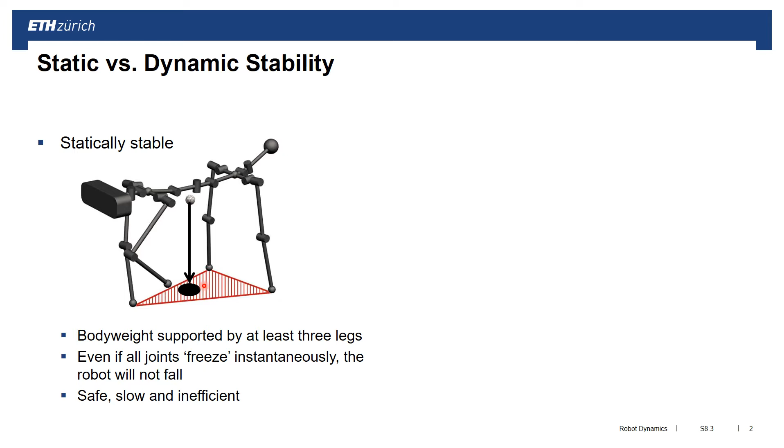When talking about control, we have to distinguish between static and dynamic locomotion. Static locomotion means that we are statically stable, so the body weight is continuously supported by multiple ground contacts, by three ground contacts that make an extended support polygon, and the center of gravity stays within the support polygon. That means even if we freeze all the joints and immediately stop the system, the center of gravity remains within the support polygon and the system does not fall over. This is how systems used to be controlled when we only had position controlled systems that moved relatively slow, statically stable. I wouldn't say this is the type of research people are doing right now.

The second type of gait we have to look at is dynamic walking. Dynamic walking means we have only few points in ground contact - there might be just single point contact, no ground contact, or lines of ground contact. That means that if we stop the robot, it will just fall over, so it has to actively balance, otherwise it cannot stand. These gaits are typically fast and energetically efficient, but they're much more demanding for control and actuation.

In the first part of this video segment, I will discuss the statically stable part.

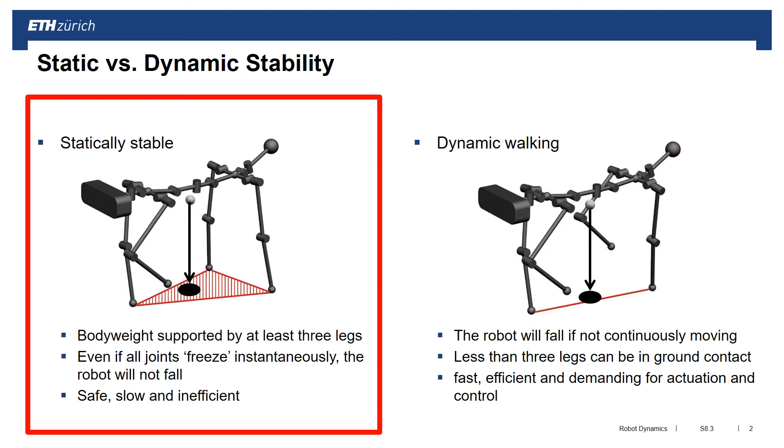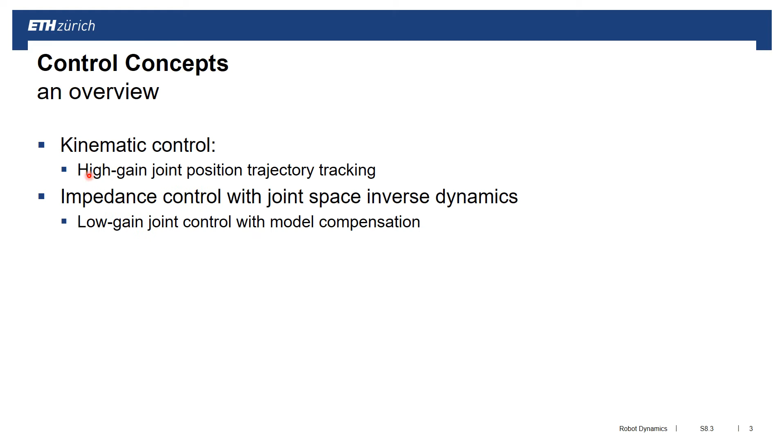In this lecture, we looked at 4 different control concepts. The first thing we looked at was kinematic control, meaning we were planning a position motion with high gain joint position trajectory following. The second thing we looked at was impedance control with joint space inverse dynamics - in other words, we included PD feedback gains in every joint, like a spring damper element for every joint, plus some model-based compensation, so low gain joint feedback plus model compensation.

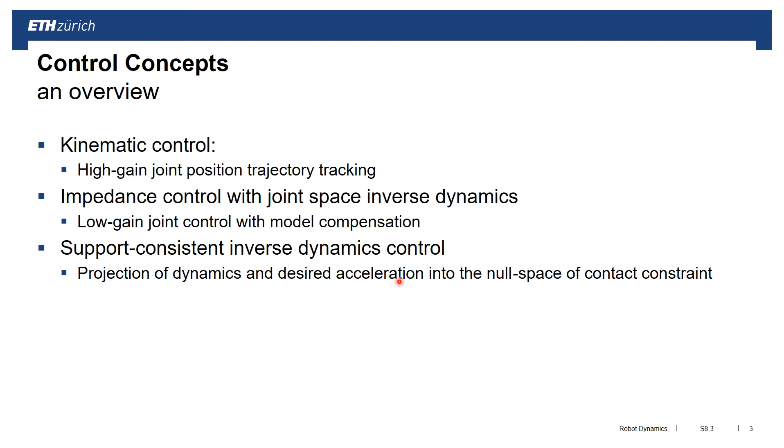The third control method we looked at was support consistent inverse dynamics control, which means we defined how the system is moving, then projected the dynamics and desired acceleration into the null space of the contact constraints, and did inverse dynamics with the support consistent formulation. The fourth and most powerful formulation we derived was task space inverse dynamics control, where we directly regulate in task space by defining a sequence of quadratic problems, a sequence of objectives with different priorities.

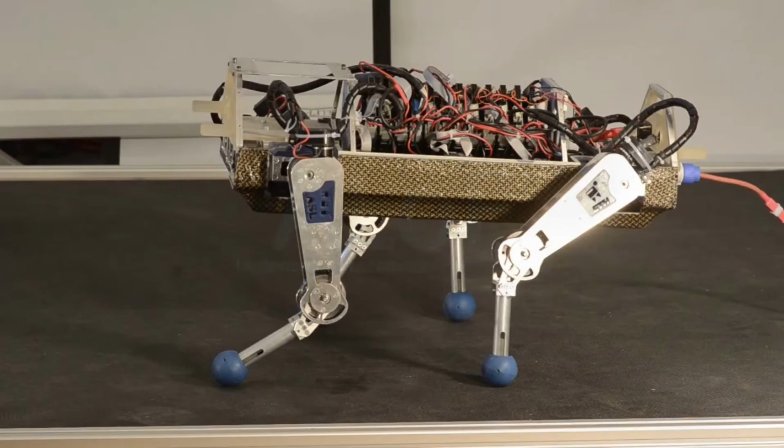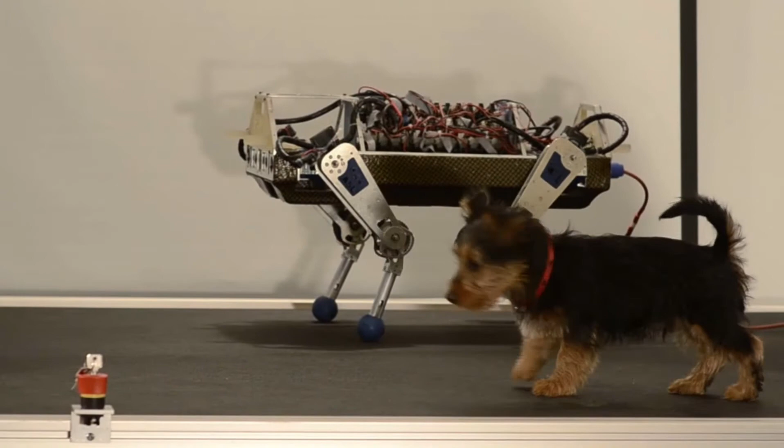We would like to start by looking at one of our very first prototypes developed at ETH. This is Alof, walking purely statically, so the center of gravity remains always within the support polygon. That means we're shifting the center of gravity, then moving one leg, moving another leg, shifting the center of gravity again. What's happening is that the main body controller determines the joint angles that need to be sent to the controller and then executes this. So this is pure feed-forward position planning and execution.

We are looking at this in the form of a small quiz where we calculate the motion of a complex gait with such a system and then apply either inverse dynamics or inverse kinematic control.

If you look at the floating base system of this Alof robot, we have 4 legs. Every leg has 3 degrees of freedom: a knee flexion extension, a hip flexion extension, and a hip adduction and abduction degree of freedom. So 3 degrees of freedom times 4 legs equals 12 actuators in total. Plus we have the base, which is free floating, connected to the inertial frame through an unactuated base - 6 degrees of freedom, 3 in position and 3 in orientation.

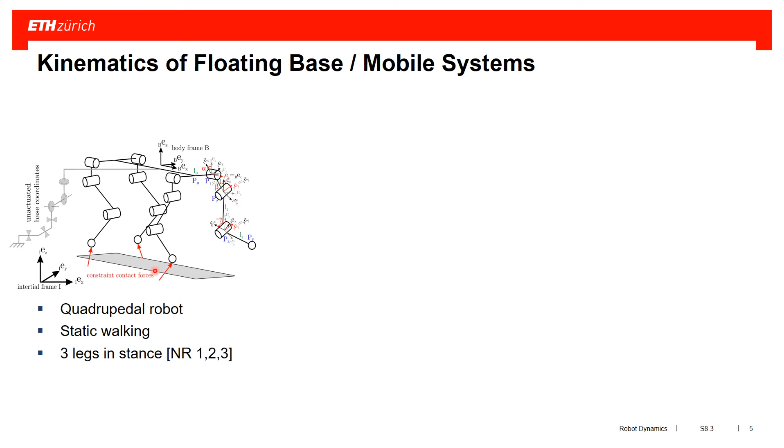If you do static walking, we're moving one leg at a time. We have 3 contacts active and we're moving the 4th leg. So we're indicating legs 1 to 3 as stance legs, and the fourth leg in swing phase. That's the problem. Now we'd like to first identify how many generalized coordinates we have, how many base coordinates, how many actuated degrees of freedom, and how many contact constraints are active in this situation on the left, when three legs are in ground contact.

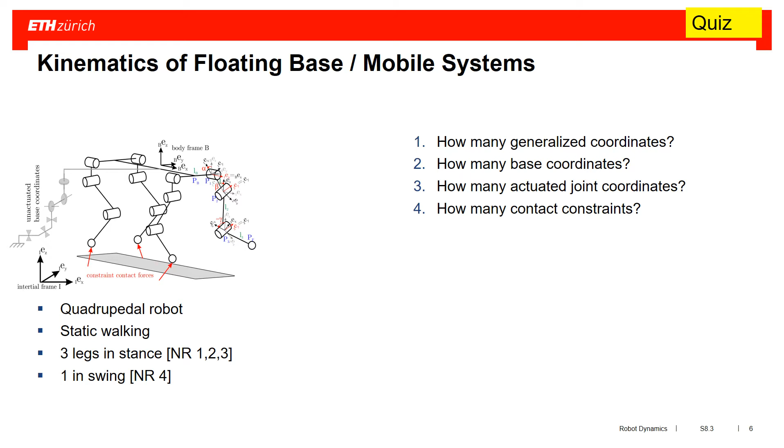The second set of questions asks you to write down the contact constraints, then how many degrees of freedom remain controllable if these contact constraints are satisfied, and which degrees of freedom remain controllable. What can you still do with this machine while ensuring that these three feet remain in ground contact?

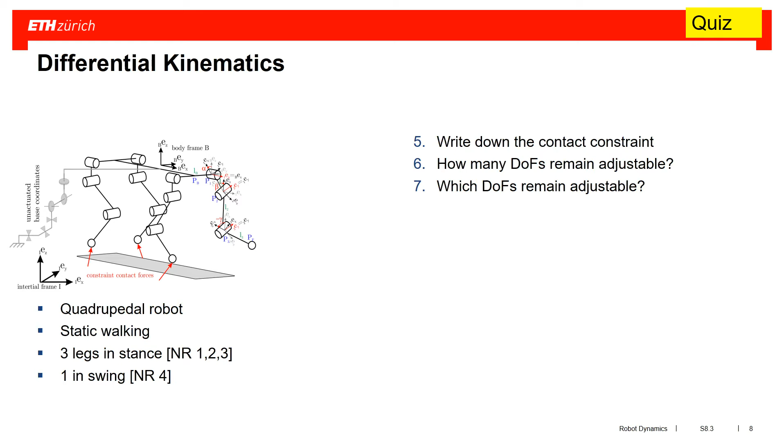The third batch of questions gives you a desired swing velocity for a point, the desired velocity of this fourth foot point with respect to the origin in world fixed frame. I want you to tell me what is the generalized velocity of the complete robot, and then whether this is unique, the only solution we can achieve.

The last one is whether it's still possible to follow the desired swing trajectory without actually moving the joints of the fourth leg. Can I follow a predefined trajectory here while these three joints are locked?

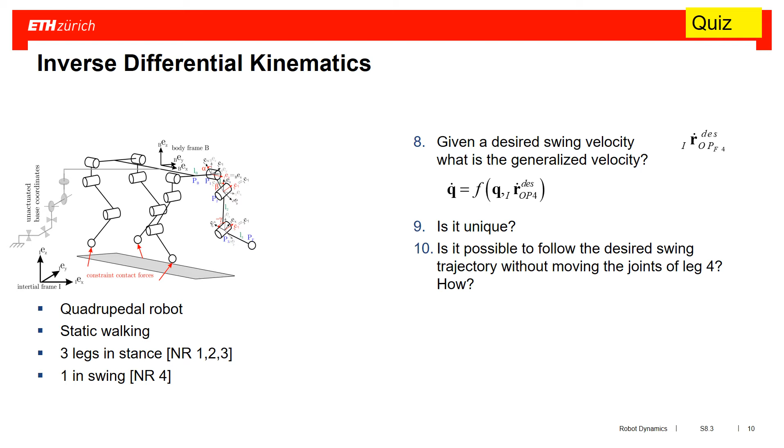In the next set of questions, we look at the following situation: we have two tasks. First task is that we want to move the foot, the position of that foot 4. The second task is that we want to have the base position and orientation constant, so the base here should not move at all.

What I would like you to do is write down the solution for case A and case B. When we have these two tasks given through the Jacobians and the objective you want to achieve, what is the solution if I'm formulating this as single task optimization? What is the solution if I formulate this as multiple tasks?

Then I want you to write down what is the difference between these two formulations, and what happens in a singular configuration. Assume that this leg is fully stretched out. What happens then?

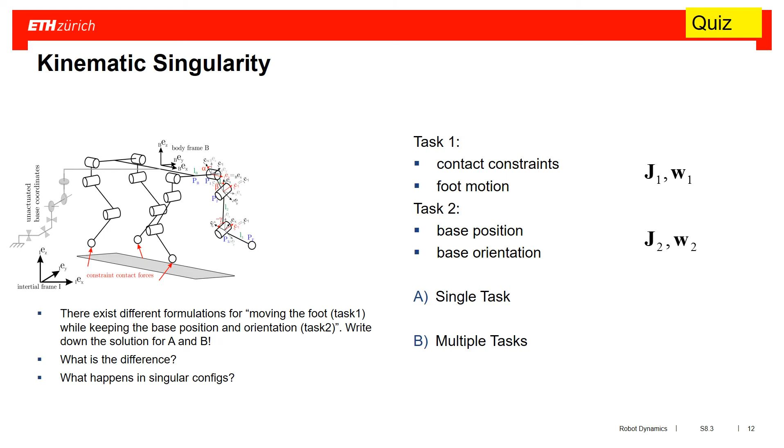Write what J1 is as a function of the J's we introduced before, write what this W is, and then the solutions for A and B.

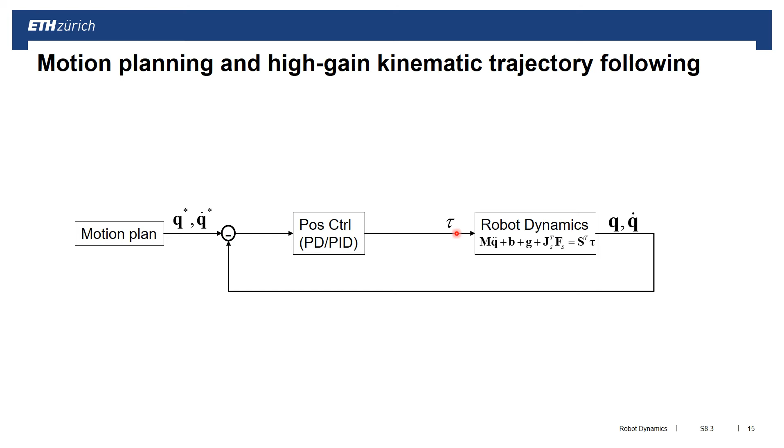This quiz has given us, in the end, a Q dot desired, a motion plan, so we know how the system is supposed to be moving. Now the classical simple method is that we have a very high gain position controller that takes the measured Q and the measured Q dot as well as the planned one, does a PD feedback on it to calculate the joint torque, and with that modifies the robot dynamics.

This is what we're doing, for example, on the ALOF robot, which was a robotic system we developed at ETH about 10 years ago. This is a purely kinematically controlled machine, and what you're seeing in this video is pre-planned trajectories that are blindly executed. We're planning in joint space and executing these joint trajectories. The machine is becoming pretty versatile, there's many things we can do. However, we're also limited to environments that are perfectly known to the robot.

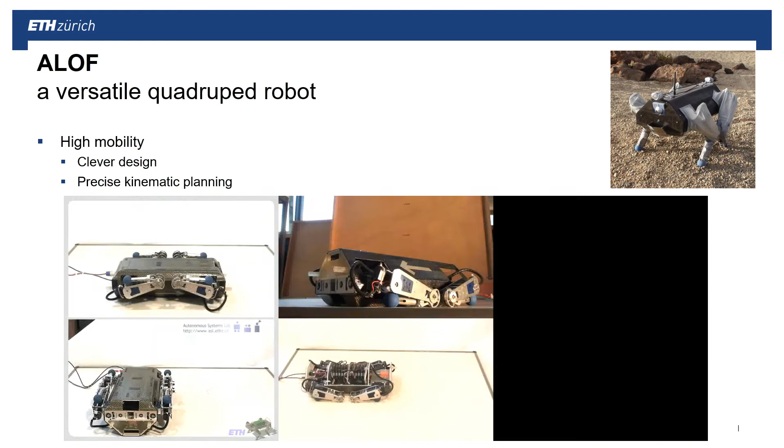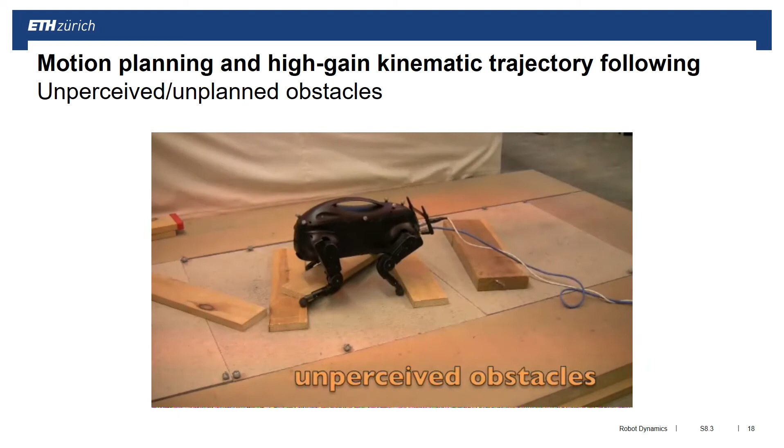This can be nicely seen in this video with the LittleDog, a similar robot that executes pre-planned motion trajectories in joint space. But now we have obstacles on the ground which are unknown to the robot. It only executes feed-forward trajectories in position space, and as you can see, whenever we hit an unknown obstacle, this robot is prone to tip over and cannot really operate like that. So if you want kinematic planning and execution, you really need to know very precisely all the details about your environment and carefully plan for that.

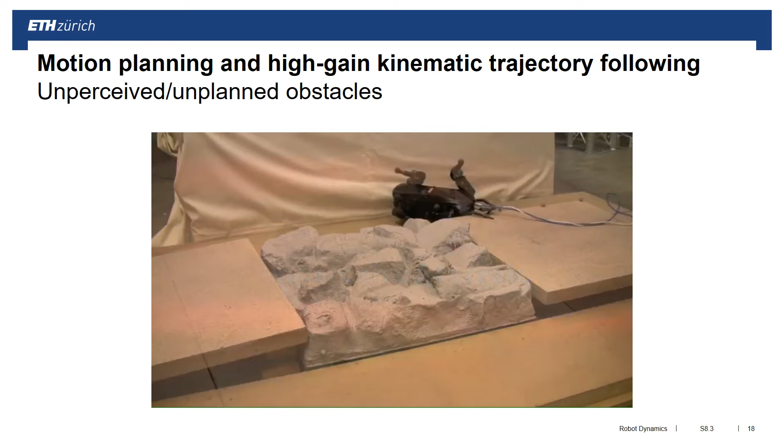An alternative approach is that instead of having this high gain feedback control on position space, one can think of lowering the gains, making the system much more compliant. That means if you have an obstacle, it will disturb your planned motion, but the change in torque is not that big, so we can still operate the machine. However, as we have seen in earlier classes, this requires some sort of model-based compensation, and this we do typically through inverse dynamics control.

So we are calculating a feed-forward compensation, which is the support consistent dynamics, the inverse of that. We're taking an inverse dynamics of a support consistent description to calculate the feed-forward torque, and we add the feedback torque, but now with much lower gains.

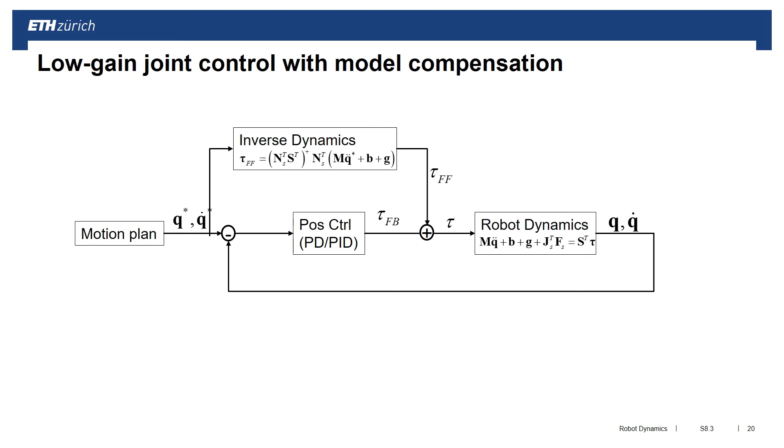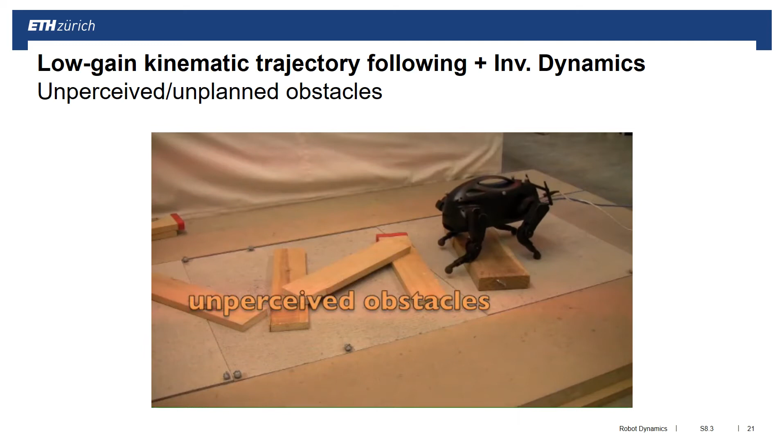If you do that, you can play the same experiments as we were doing before with a little log, and all of a sudden this machine can really cope with unknown obstacles. So instead of just rigidly sticking to the kinematically planned trajectory, here we do the model-based compensation.

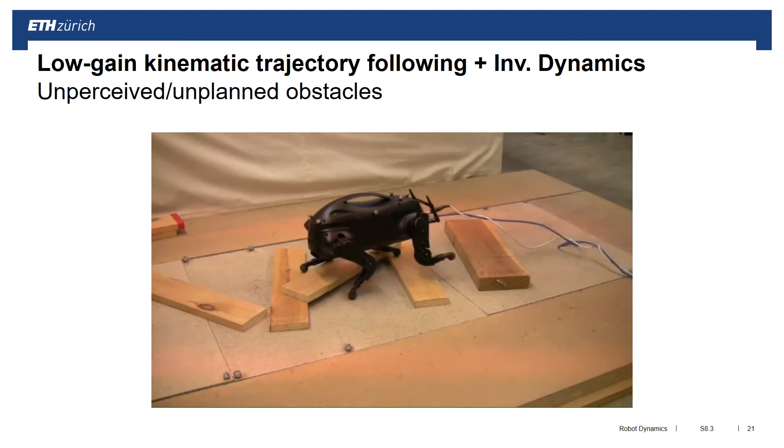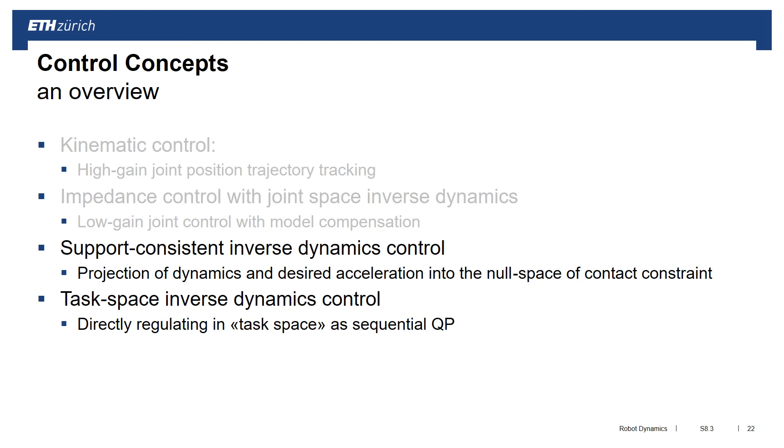Now this concludes the first part, the kinematic control and the low gain impedance control in joint space together with inverse dynamics compensation. We move on now with the two formulations for support consistent inverse dynamics control, and then finally end up with the task space inverse dynamics control.

For support consistent inverse dynamic control, what we need to do first is find the desired acceleration and then do inverse dynamics with this desired acceleration such that everything remains consistent to the supports. In order to find the desired acceleration, we have to bring together all the different tasks that need to be fulfilled.

First task is here, we want to follow a desired swing leg. We formulate this as a task in acceleration, so that the acceleration of that foot is the Jacobian times q double dot, plus j dot q dot, and that must be equal to the desired acceleration at that foot point, which is a feed forward acceleration plus a feedback on the position offset and velocity offset at this point that we are tracking.

Then we want to move the base along this red line. Also here a high-level planner has given us a target base configuration and motion and position. Here we have this w dot of the base, which is j base times q double dot plus j dot q dot, which is equal to the desired acceleration at the base, composed of a planned acceleration plus a feedback part on the position and on the velocity.

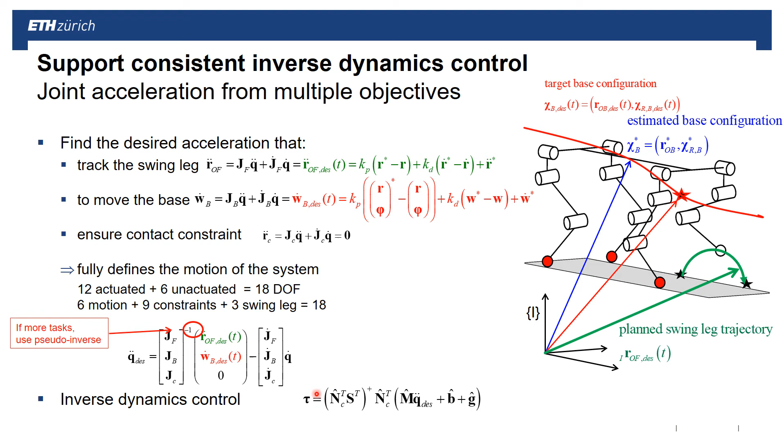And then we do inverse dynamics control. So we take this desired acceleration, we inject it into our support consistent dynamics, and since we do this projection with the support null space projector matrix, we get rid of the contact forces, so we have this independent of the contact force, and we can directly calculate the joint level torques.

The second control method we're looking at is task space control as a quadratic program. This slide is a recap of what we heard two weeks ago, but I think it's important enough to revisit.

What we're doing is optimizing for x, the stacked vector of acceleration, the motion of the system, the contact forces, and the joint torques we need to apply. We formulate all the constraints and objectives as a least squares problem: the dynamics equations of motion for a floating base system, which include contact forces and the selection matrix that makes the base unactuated.

This is reformulated with an A matrix equal to M, the contact Jacobian transposed, and minus S transposed, plus a B vector. Inserting x gives the equation on the left side. This is an equality constraint that must hold, so this optimization objective has the highest priority. However, we have a non-unique solution, so we can trade off different torque distributions with different ground contact force distributions, and depending on how well we define the motion, we can also trade off with the motion.

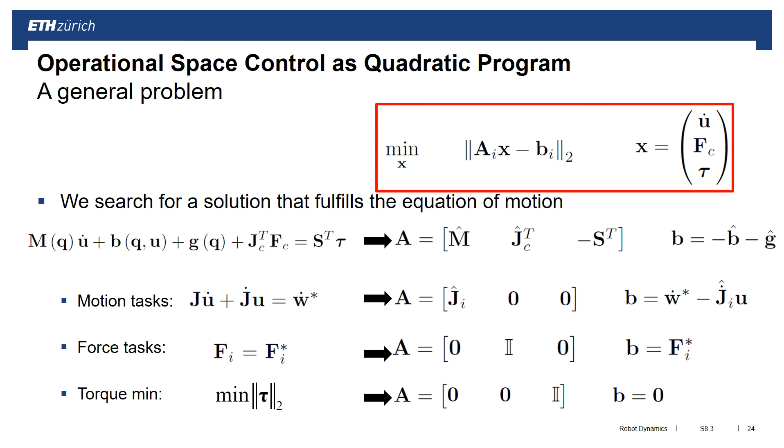So we write this locomotion as a multitask optimization problem. Step 1: we optimize the motion while ensuring the equations of motion are satisfied and the contact constraint holds. These two things always have highest priority - if they're violated, we have an inconsistency in the formulation.

We also have other hard constraints, namely that you have to have a positive ground reaction force in the vertical direction, and that you have to stay within the friction cone, otherwise you would slip away. These two things can always be fulfilled - there's no way this isn't fulfillable - but you can always compromise on the motion.

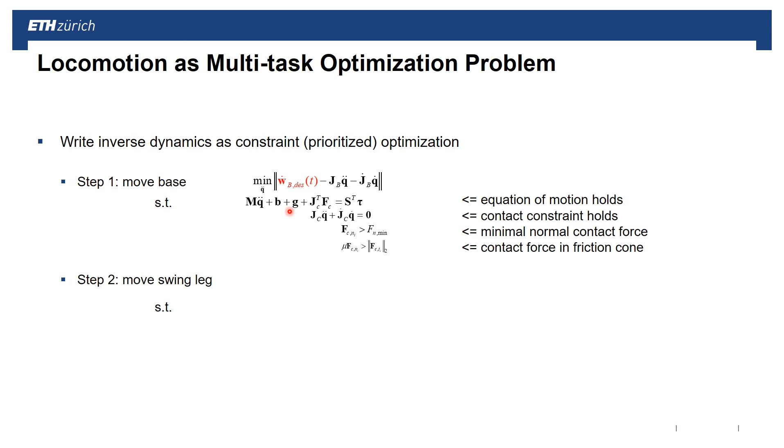Step 2 is you want to also, for example, swing a leg. That means you add an additional objective for moving the leg such that the same constraints hold as above, but additionally we ensure that this higher priority task is not influenced, so the cost achieved in the optimization above doesn't change - we're not compromising more on that task.

Most of the time these priorities and the way we formulate the task are selected such that this C1 is 0. Then as a last step, we minimize, for example, the torque, or minimize the total force to get an equal force distribution, or minimize the tangential force - but all of that only subject to all these higher level elements being fulfilled.

We're going to see in the case study next week how all of this comes together in a complex formulation for doing a locomotion maneuver or a locomotion interaction maneuver.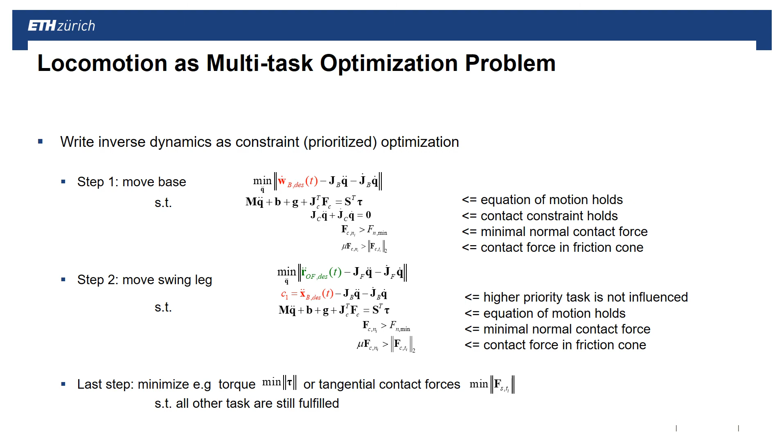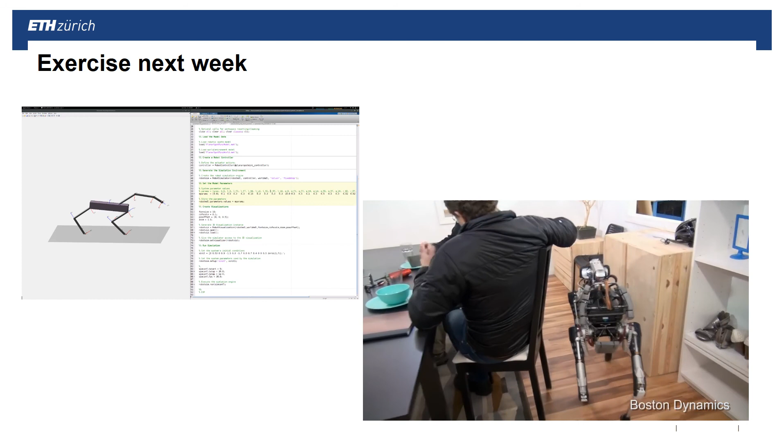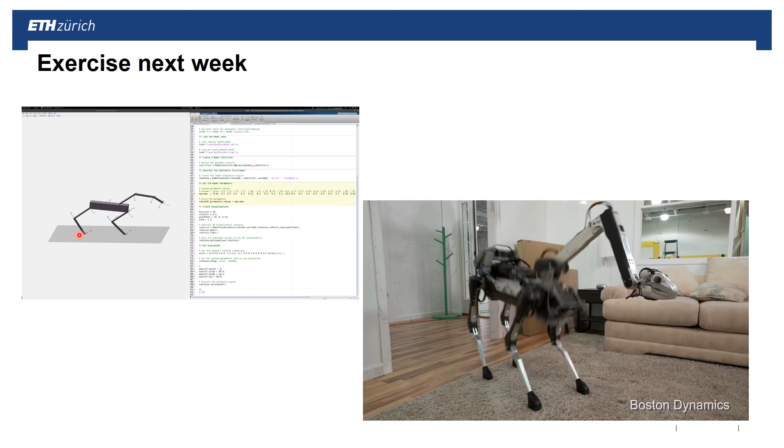For next week's exercise, we're applying this formulation to the earlier Spot version - one of the very first prototypes with a rudimentary kinematic model. We're formulating multiple objectives for how the base is moving, how the end effector is moving, and how ground contact constraints must be satisfied with the environment to achieve motions like this - for example, the end effector stays in place while the base is moving, or you keep the base at a certain place while operating the end effector, and so on.